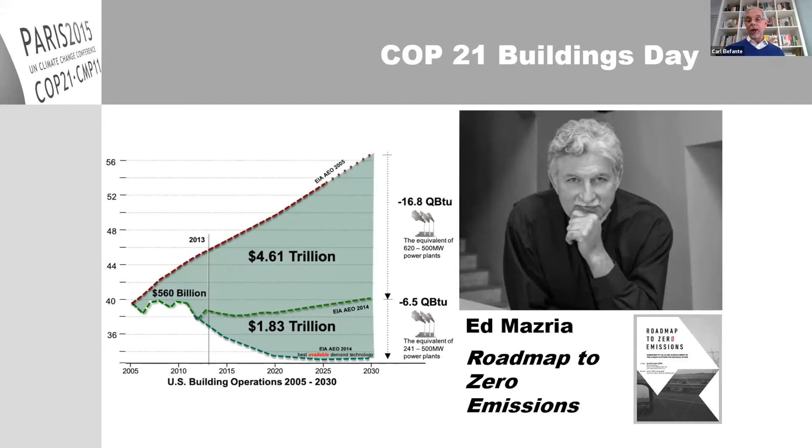And of course, Ed Mazria, who is our fearless leader with pulling together this incredible teach-in, he was one of the key people that went to Paris and talked about the importance of the building sector and its influence on both the problems of climate change, the causes of climate change, and the needed actions to resolve climate action. And we all now know these dire statistics about just how much the building sector really is responsible for greenhouse gas emissions. And it's our challenge.

This is what we in this industry and we in this generation of architects and planners and the people that shape the built environment, this is our challenge. This is our hour of maximum danger. This is our arms race that we have to turn into the space race. And we know what to do. We know how to solve this problem. It doesn't require an invention of some magic unicorn to solve this problem.

We need to be completely dependent on renewable energy. We retooled once, we can retool again. It's hard to remember that John D. Rockefeller was a very, very, very wealthy man before the automobile ever needed a gallon of gasoline. The petroleum industry was built on kerosene for lamps and heating, and it transformed itself when electricity came along and it was no longer needed for those things into the fuels for our automobiles.

And it's time for us to transition again to renewable energy. We've done it before, it's time to do it now. Time to do it quickly. We need to operate our buildings with renewable energy without carbon, just like we need to operate our vehicles. And then also we need to eliminate the embodied carbon. So we know what to do, we know how to do it. But we also know from this reset and from other things that have led to this reset that it's really time for us to be more ambitious with our goals.

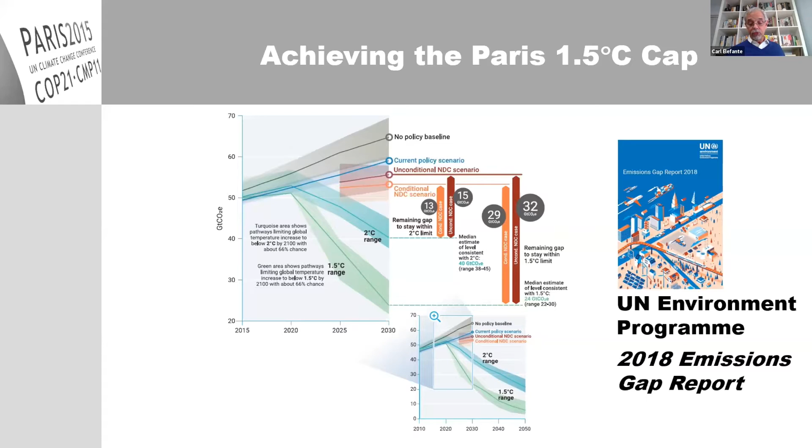So we know what the hour of maximum danger is, and we know what we need to do about it. And we know that we in the building sector, those who shape the built environment, have a very, very big role to play in getting to climate solutions. And I would like to talk about the importance of sustainable stewardship as a perspective to really understand how we can contribute by addressing the existing building stock.

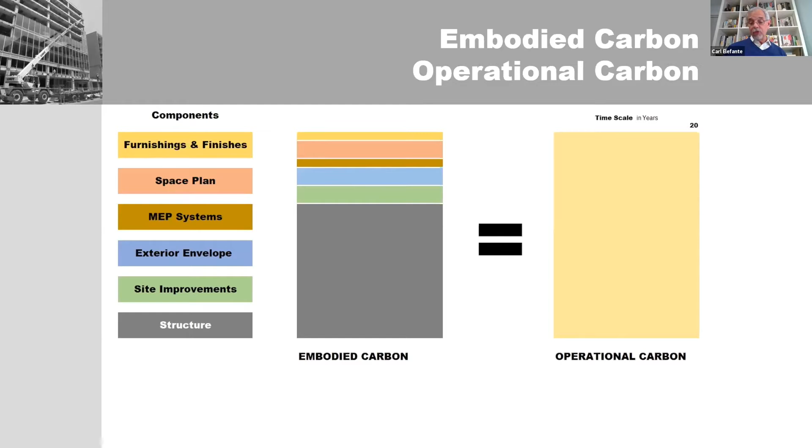And with conventional construction techniques and also conventional building performance, it's somewhat of a truism to say that the embodied carbon of a building is about equal to the operational carbon over something like a 20 or 30 year period. Obviously, I'm using an average here, but the embodied carbon and the operational carbon are both significant. What we also understand is that there's a time scale, there's a time frame when we look at carbon in buildings.

And with the operational carbon, it's obvious that every year, every 10 years, every 20 years, we're continuing to generate greenhouse gases. And if a building is inefficient, it actually generates pretty quickly. And as we make more efficient buildings, it generates greenhouse gases more slowly, but it continues over time, and it continues and it continues. Really, that efficiency is a gift that keeps on giving. And what it means over time is hugely important.

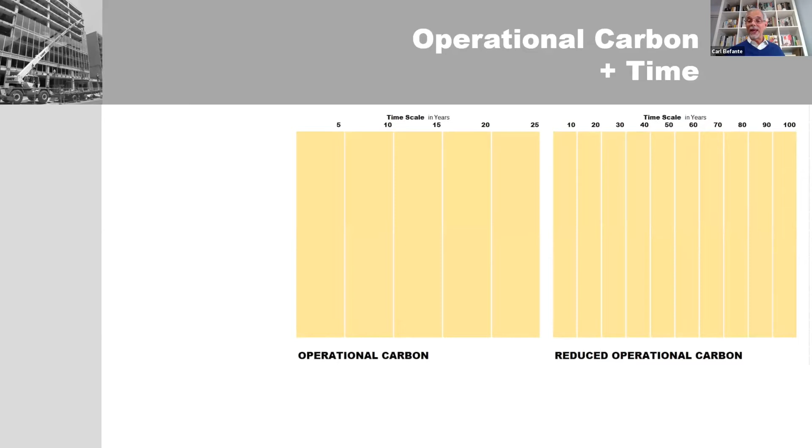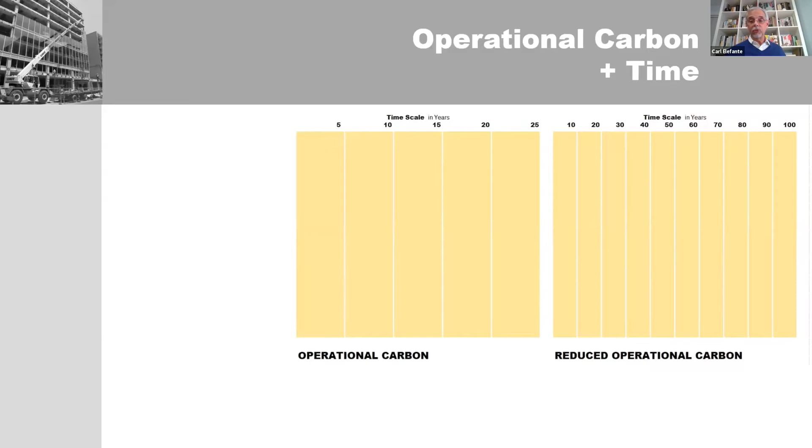And you can see here that with a building that meets the efficiency levels that we think today are minimum code levels that are essentially 75% more efficient than conventional, that what you consume in 100 years is basically equivalent to what you would have consumed in 25 years. So the time frame is enormously important.

Well, that's true with embodied carbon as well. And we tend to not think about embodied carbon in terms of its timeline. It's just this one-time thing. There it is, we built the building, that's the embodied carbon. But that's actually not true. Buildings are complex systems made out of many different components, and some of them age very quickly and really need work and reinvestment of carbon on a very routine basis.

Some of them in a kind of a medium time horizon where it might be 20 or 30 or even 50 years. And then some of them are literally one-time investment. For example, the basic structure of a building, it's going to be there for the life of the building. It doesn't really require a lot of reinvestment. But again, over that same 100-year life, there really is a life cycle of embodied carbon as well.

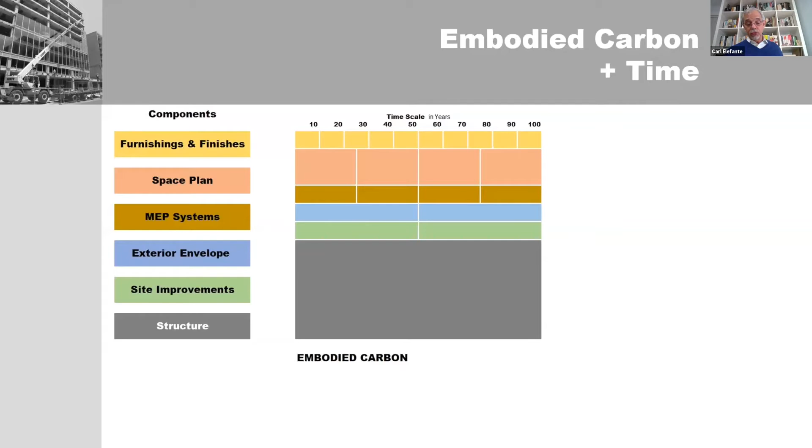So we need to think about embodied carbon as a time frame issue, as a life cycle design issue as well. And I want to define this a little bit more with a little bit of the numbers side of it to get a sense of the scale of what we're talking about here. And I'll start with somewhat of a paraphrasing of something you may have seen Ed Mazria talk about. The modern-era city is just an incredible invention of the post-World War II era, and we've transformed the face of the earth with literally hundreds of cities.

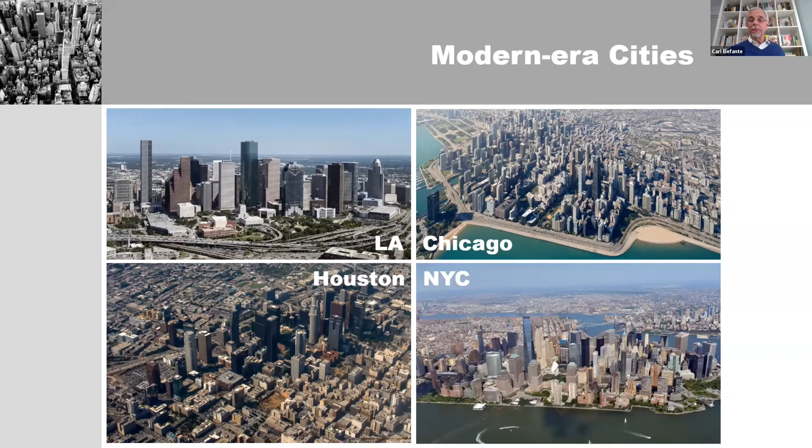You know, there are more than 500 cities with a million residents, and there are over 50 cities with more than 5 million residents in the world. So the world has been transformed since 1945 with this incredible explosion of building. It's everywhere. These are the 4 largest cities in the United States, only one of which is world-class large, and that's New York. The others are little towns by comparison on a world scale. But there's hardly a building in these photos that was built the year I was born.

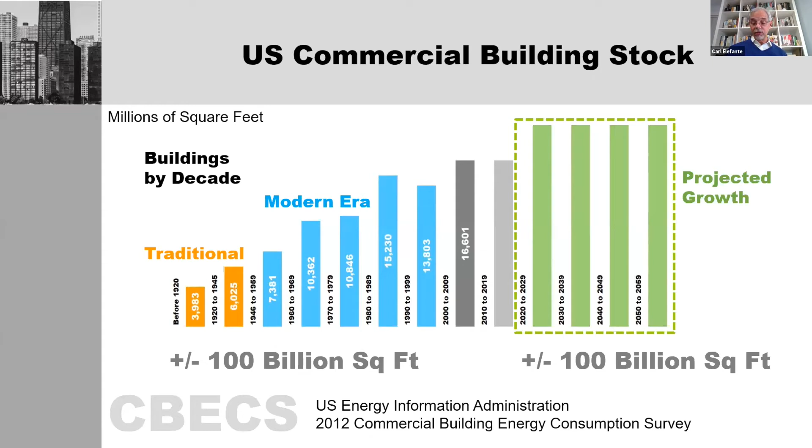And they're very different buildings. Those modern era buildings are fundamentally different from the 19th century buildings and the traditional buildings from eras before. In the first place, they were absolutely made addicted to fossil fuels. If you unplug them, the windows don't open, the mechanical systems don't work, the elevators don't work, they become uninhabitable without consuming energy. That's a very different paradigm from buildings that were built to be able to open the windows and have ventilation and lighting, given to you by the sun and the wind.

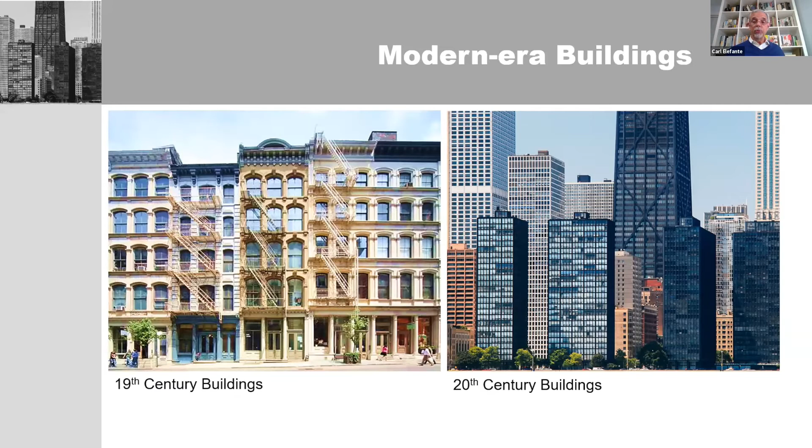And in fact, there's a fair body of literature that's really developed talking about just what a bad paradigm, what a bad design idea so many of these modern era buildings were built to. They're quite difficult buildings. They're a challenge to deal with. As a sustainable steward, as myself, they're challenging.

One of the reasons why I think it's important to talk about this now is that some of these very, very large scale buildings are beginning to be taken down. And the idea of taking a 50 or 60 or 70 story building and throwing it in the garbage, putting it in the landfill is just, I think it's criminal behavior. It's urban vandalism on a scale that's almost unimaginable.

And 270 Park Avenue, which is a building that is being demolished as we speak in New York City, is perhaps the poster child of this. And by the way, it's one of the great achievements of Natalie de Blois, who was the only female design partner at Skidmore, Owings and Merrill from the mid-century modern era.

So what can we do with this generation of buildings? Here in the US and in many places around the world, it is the major challenge that we're faced with: getting rid of the existing footprint. The existing footprint of greenhouse gas emissions is coming from existing buildings. We have to work with them. We have to do something about them. We have to do something with all of them. That's where the current footprint is coming from.

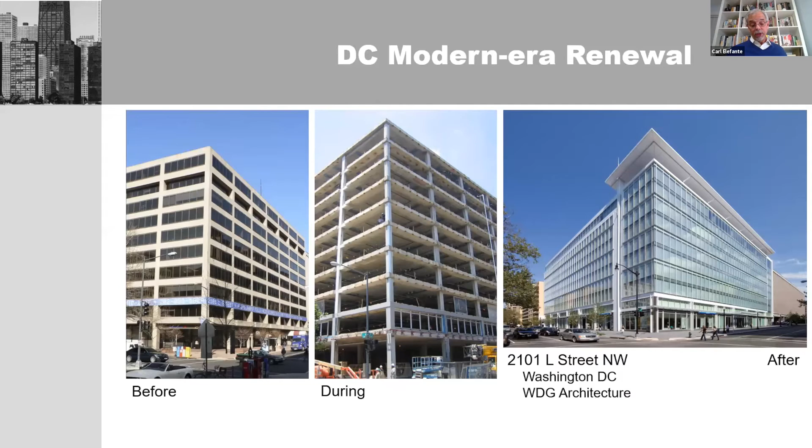Now, that may seem like an awful lot of work that's being thrown out and not very much work that's being kept. But let's dig into that a little bit. I'm going to show you an example of a project that we did in Detroit. And this was to take a building that was a kind of typical mid-century tower and repurpose it from an abandoned office building and really turn it into housing.

So just like the buildings we saw from Washington, what we did basically was to keep the structure. Doesn't sound like much, but we kept the floor plates and the building frame. We reskinned the building in its entirety. And then we completely gutted the inside, new partitioning to make apartments, put kitchens in, put bathrooms in to make it apartments, not office space, new mechanical systems, plumbing systems, etc. It's like a new building, except that we kept the structure. So what does that matter?

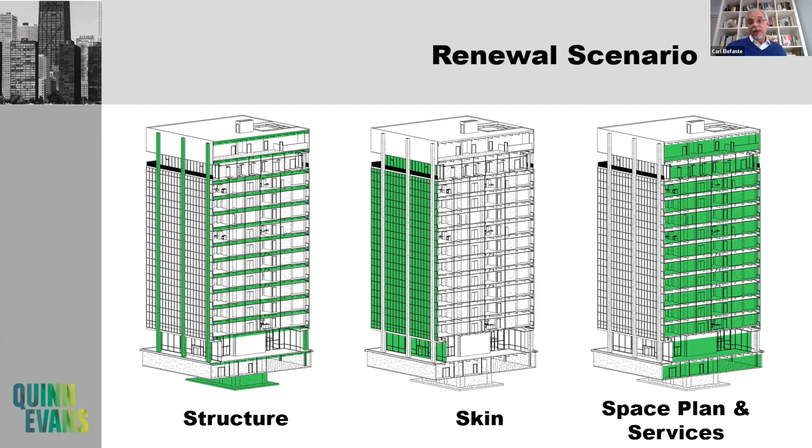Well, when you start to look at the embodied carbon and compare it to what you get as a result with the operational carbon improvements, the operational carbon improvements are very real. They're very important. They are the gift that keeps on giving. But the reskinning was only somewhere between a quarter and a third of the actual embodied carbon investment that we had to make.

Most of it was to redo the interiors of the building, okay? But by keeping the structure of the building, we avoided doubling again the amount of embodied carbon investment that would have been required if we had simply torn the building down and replaced it.

And I want to say another thing about time. The carbon payback for this building with the operational efficiencies that we've built into it, with the reskinned, rebuilt, housing converted building is in 6.5 years. If we had replaced the structure as well, the payback would have been more than 20 years. So between now and 2040, that's the whole time frame. So it's important. It's important work to get done.

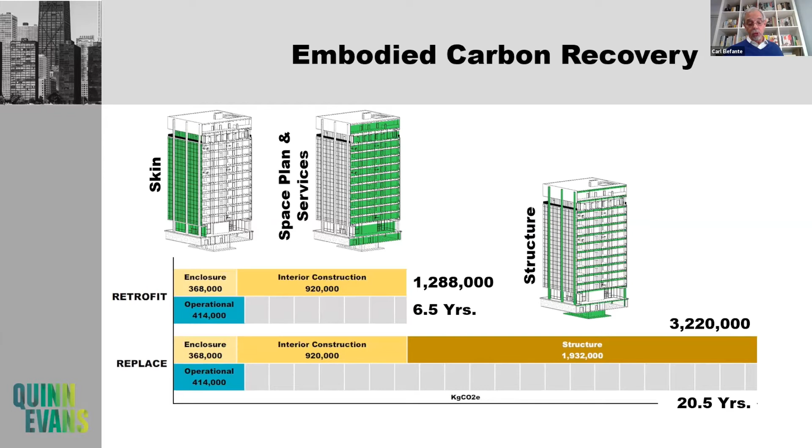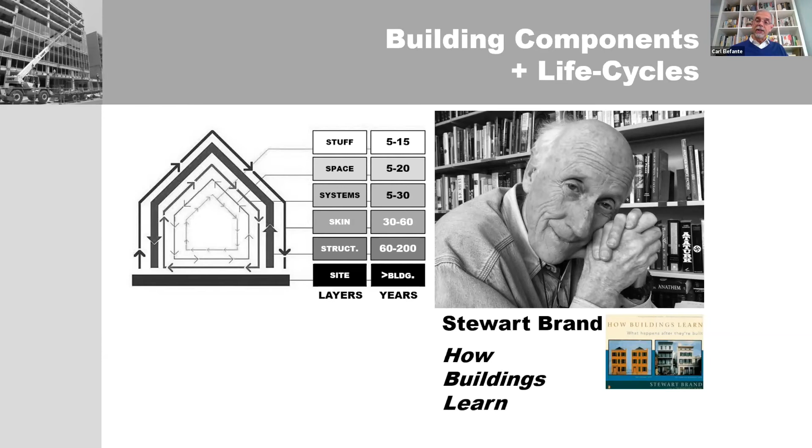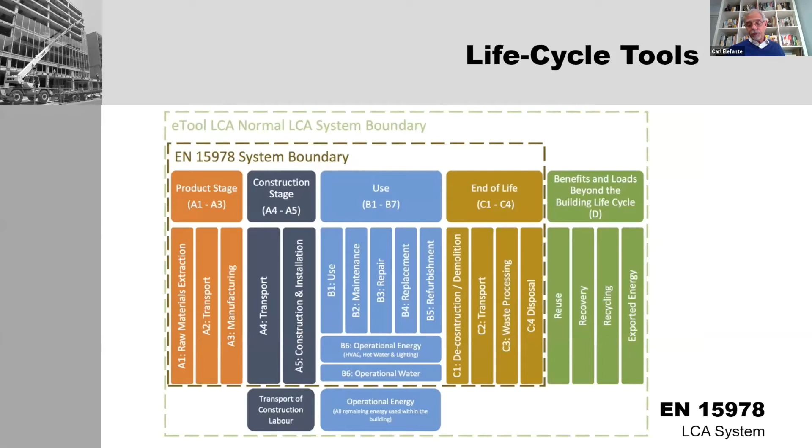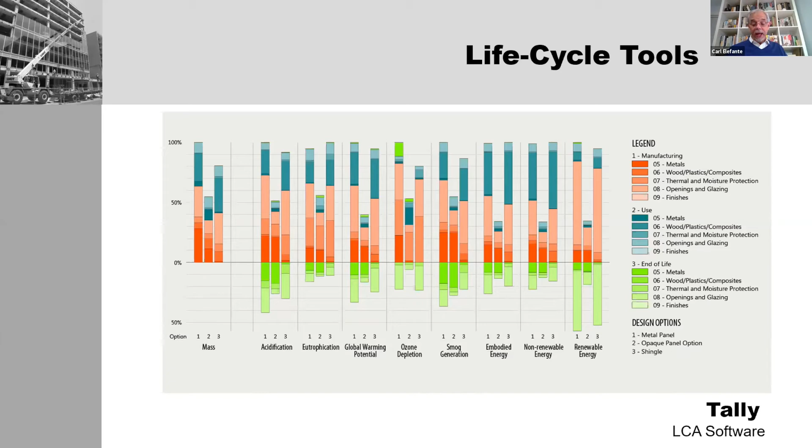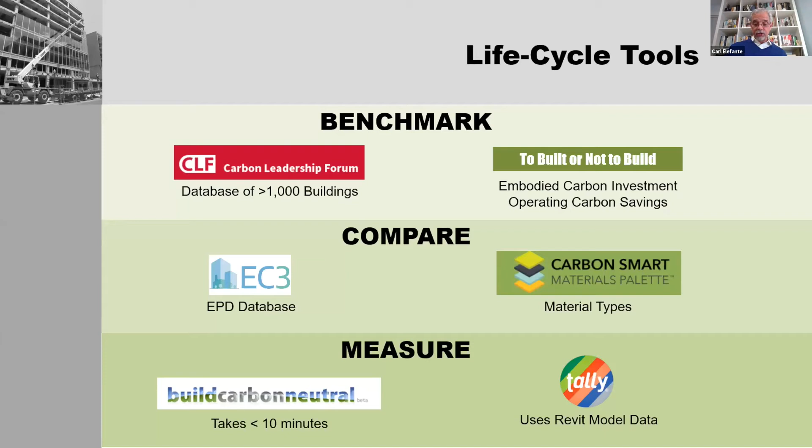Fortunately, we have the protocols, we have the descriptions of what counts and how it counts and why it counts. We also have the tools that are literally integrated into the design tools that we use to design and document buildings and to do all the calculations, to engineer them. Those tools now have integratable life cycle analysis tools for us to really get to the bottom line, to get to the numbers. There are many tools. There are some that are really to be used very early on, big picture thinking, all the way down to the tools that will let us measure the difference between one design choice and the other. So we really have the equipment that we need.

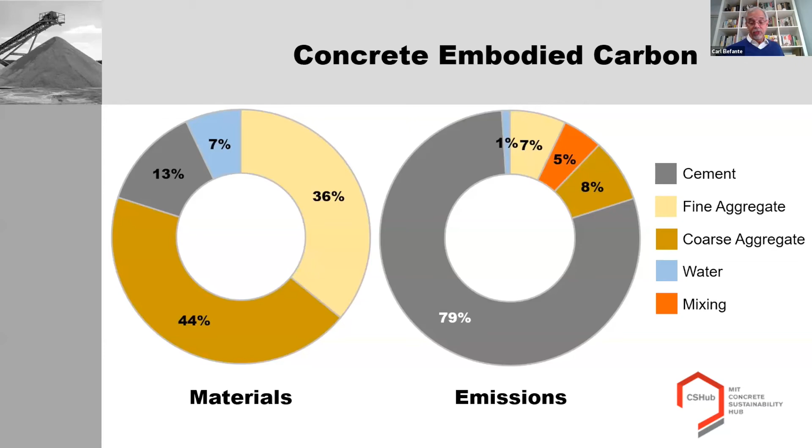Another thing I'm just going to mention here is that concrete has an enormous potential as a carbon sequestration material as well. So I just want to drive this home a little bit more in terms of really changing our attitude, having a stewardship attitude about the building stock. And really, it's a philosophy, it's a movement.

The environmental movement began when people like Rachel Carson made us aware that human beings were changing the natural environment, intended or not. And of course, most of it was not intended, and most of it was consequences that we were ignorant of. Well, we can't be ignorant of them anymore. And climate change is right at the top of the list. We know what the consequences are.

Well, saving buildings was a parallel movement that was happening at the same period of time, where there was a question, are we throwing out things that are more valuable than what we're replacing them with? And with the modern era building stock, that's a very important question to ask and to answer.

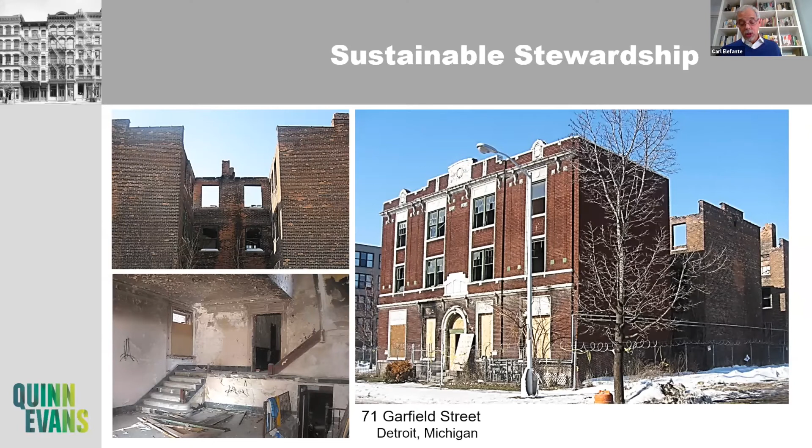This is another building that we did in Detroit, 71 Garfield Street. Really, Carl, you really want me to love a building like this and think it's valuable and take care of it? Yes, I do. Even buildings with trees growing up where the roof used to be, even buildings with no windows in them anymore. This building was able to be converted back into viable living spaces.

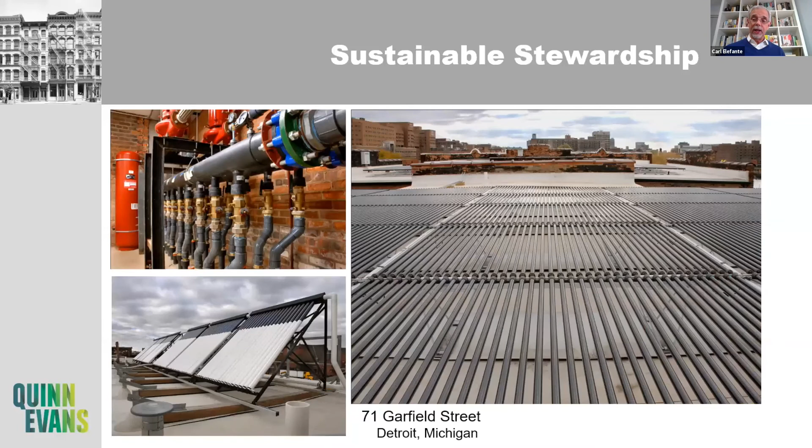It actually has a story from the Harlem Renaissance era of Detroit. This was a significant building in the creation of the African-American community in Detroit back more than 100 years ago. And we were also able to green the building. It has a solar array that covers the whole roof. It has ground source heat pumps.

It doesn't even have land for the ground source heat pump well. We borrowed it from the public space. We literally got permission to use public space for a well field. And this on a building that had no roof and no floors and no windows. There's no reason why you can't do it on your next project too.

And this point was made by a couple of the speakers earlier today, and particularly what Mr. Yu was saying about his work, kind of the low tech, high tech. We look at technology for the solution to everything. And our definition of what a green building looks like today tends to be very, very heavily dependent on technology.

And in centuries past, the technology was much lower tech, but that doesn't mean it was less intelligent. And in fact, I would even argue perhaps it was more intelligent. And the idea that you were connected to your surroundings, not that there was a machine connecting it for you, but that you were thinking about, are you hot, are you cold? Do you need more fresh air? Open a window, close a window, put on a sweater.

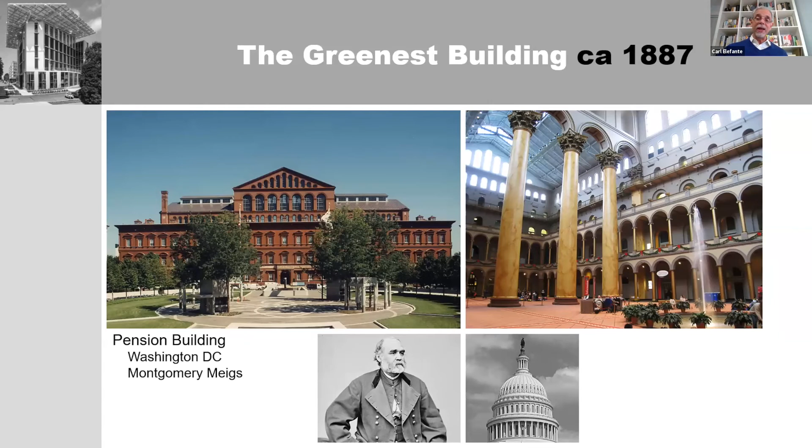This is a building in Washington, D.C., the Pension Building, designed by one of the key designers of the Capitol building, Montgomery Meigs, who was a cast iron engineer on the Capitol Dome. But it's got this built-in climate system of just simply opening higher windows and creating stratified air and creating its own wind, creating its own breeze.

And I just want to continue this to say that if you look at Ed Mazria's early work, what really led to his whole passive solar design handbook and so on, similarly, it was using the natural systems that were available rather than thinking that there needed to be a technological system for everything. Systems avoidance was a big part of what Ed's work meant in his solar generation of modern architecture.

And I just want to kind of end this with a little more contextualizing. And that is to say that we're certainly at the era of climate crisis and urgent climate action, but it's also taking place as the Earth is becoming the hot, flat, crowded world that Tom Friedman talked about so eloquently in his books. And it's the world of the Sustainable Development Goals and the New Urban Agenda. The world is urbanizing, and it's happening globally, and it's happening very quickly.

And so about 6 months before Paris, this conference, the Sustainable Development Summit, took place in New York. And the United Nations proposed and adopted these 17 Sustainable Development Goals, which we've heard referred to a couple of times today. And then about 6 months after Paris was the Habitat 3 Summit in Quito, Ecuador, at which the New Urban Agenda was issued.